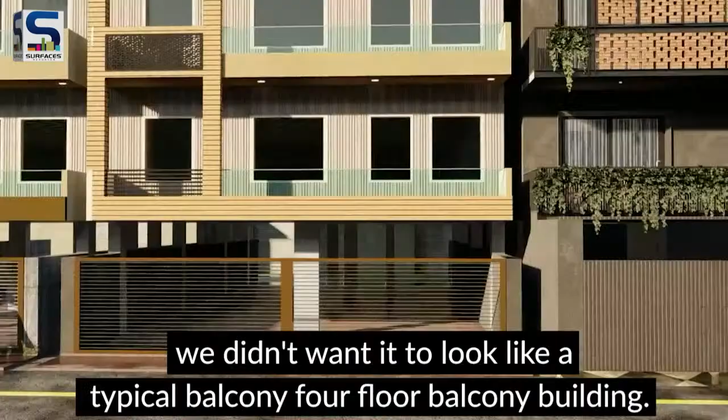My clients were very kind, and they are like friends. They agreed that if we want to explore something, we can go ahead and explore a different kind of material, but it still has to be within the budget. For the facade, we didn't want it to look like a typical balcony, 4-floor balcony building. So we wanted to give it the feel of a house.

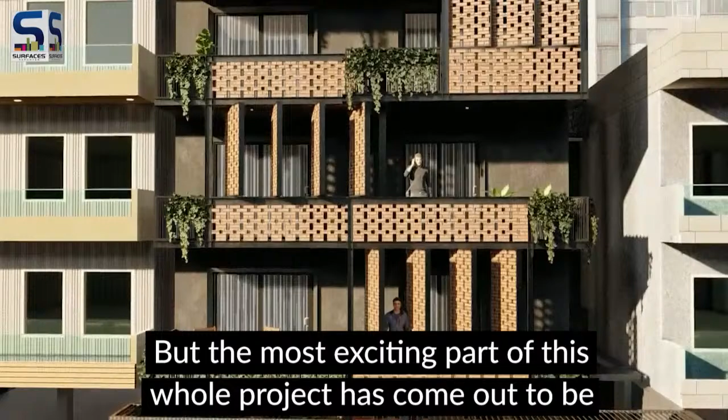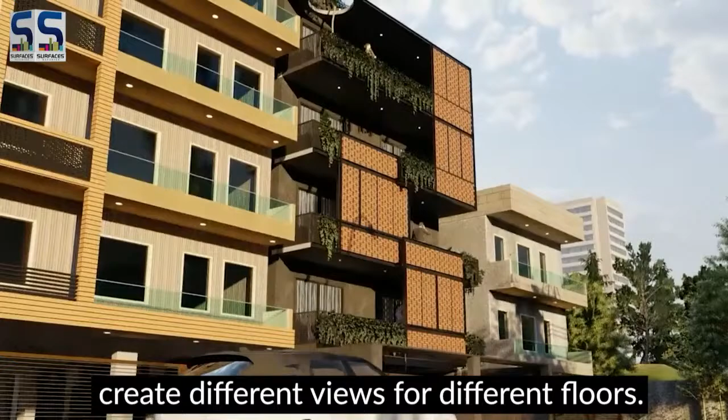But the most exciting part of this whole project has come out to be the kinetic facade that we have created. We created fins which keep on moving at any angle. Every floor has a cluster of fins which are staggered and can move in different directions during the course of the day or even night. So from outside, it creates different angles of fins, creating different views for different floors every single day.

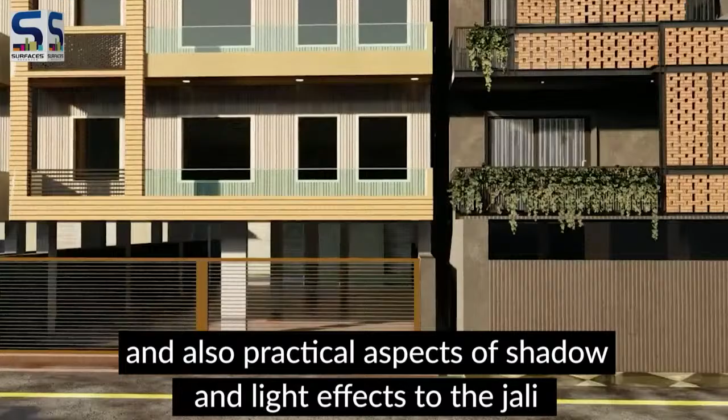You can change it. And from inside, you also get this aesthetic, as well as the practical aspects of shadow and light effect through the jali, through the big brick jali fins. So from inside, you get to see different kinds of shadows and light, and it also protects that side.

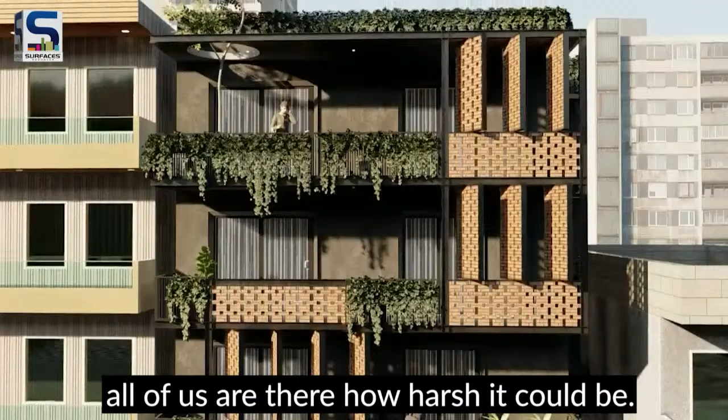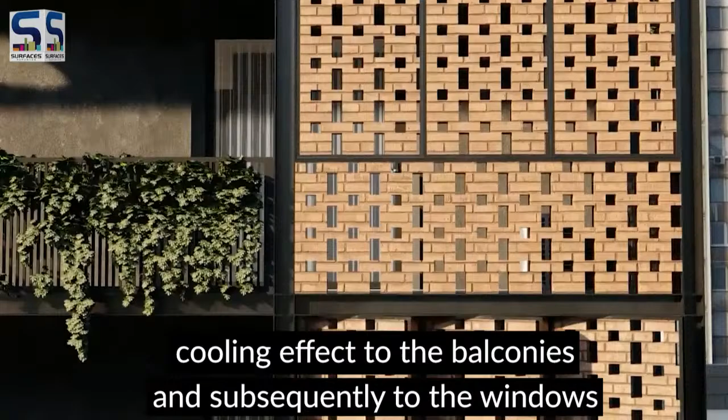The front is southwest facing, which gives very harsh sun during summers, and Gurgaon summers, all of us are aware how harsh it could be. When the sunlight falls and we change the angle of the fins, it also blocks it and creates a very nice screen to give a cooling effect to the balconies and subsequently to the windows of the rooms next to the balcony.

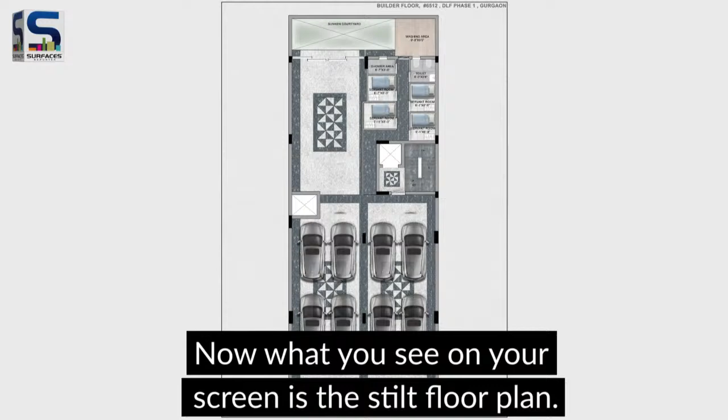Now I'll take you to the stilt plan and the terrace plan quickly. What you see on your screen is the stilt floor plan. We have our car parking systems, and some floor pattern that we had worked out. We have 4 servant rooms also on the stilt floor, which will cater to each and every floor — there are 4 individual floors, so the servant rooms are here. We have a sunken courtyard because we have a basement also, which will be utilized for future purposes. It's just a hall for now, but we wanted to give it natural light.

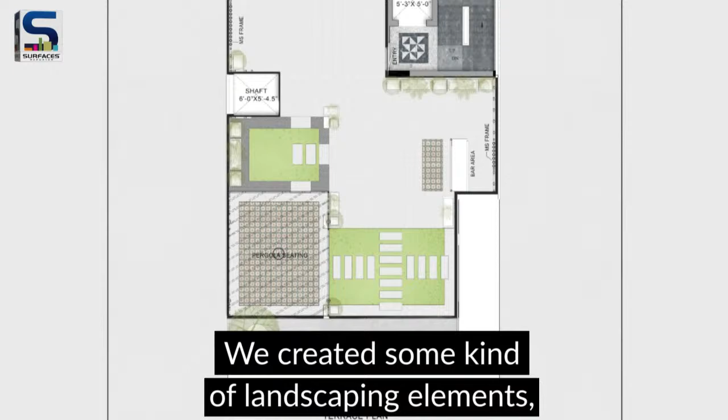Now we'll go to the terrace. We created some landscaping elements, some flooring, some seating, and some pergolas.

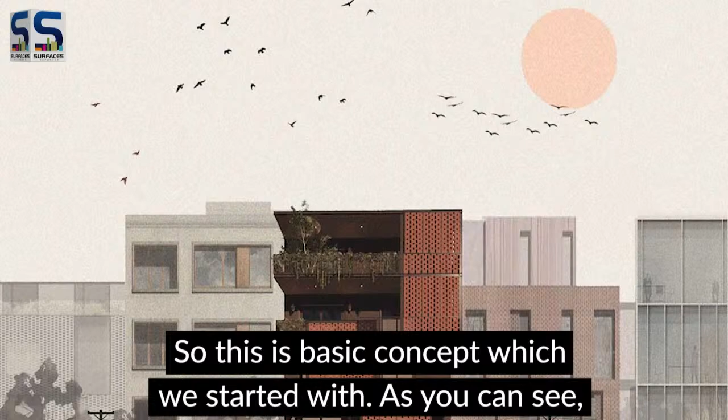Now I'll take you to the elevation, which is the most interesting part of this project. This is the basic concept we started with. As you can see, the lower 2 floors are a staggered screen, and the upper 2 floors are above each other, with a similar kind of screen.

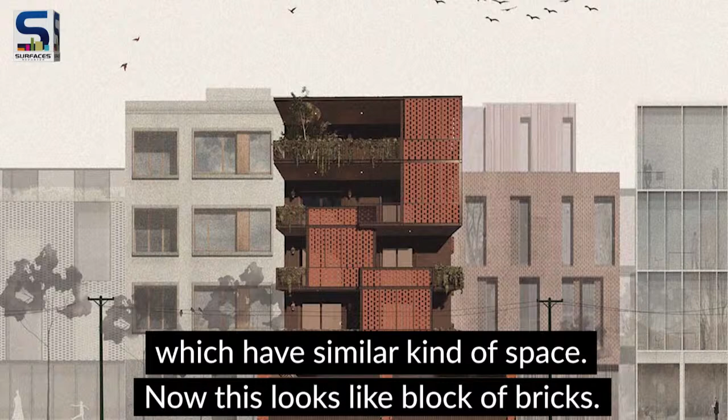Now, this looks like a block of bricks — an interesting elevation, but what is happening, we don't know yet. We went one step ahead and created something like this, which I'm going to share with you on screen.

So these are the openable fins, what you can see. Now, as we can see in this elevation, the fins are opening at around 45 degrees, all in the same direction. But here's an interesting part: it can open at any angle. Every fin can open at a different angle, and it can be rotated very easily, just like a ball bearing.

And you get to see very different kinds of visual interest, both from inside as well as from outside. So if I'm standing on the road and looking at the building, it still looks interesting.

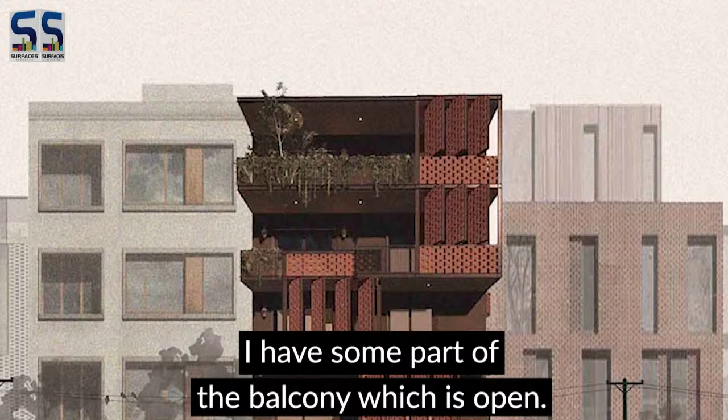When I'm standing inside the balcony and looking outside, I have the option of creating privacy for my balcony, and I can make it a sit-out. I can utilize it for any other purpose, and I still have some part of the balcony which is open. So every floor gets the same thing.

If you see it in a different way, it's just a staggered pattern, and we get the same functionality.

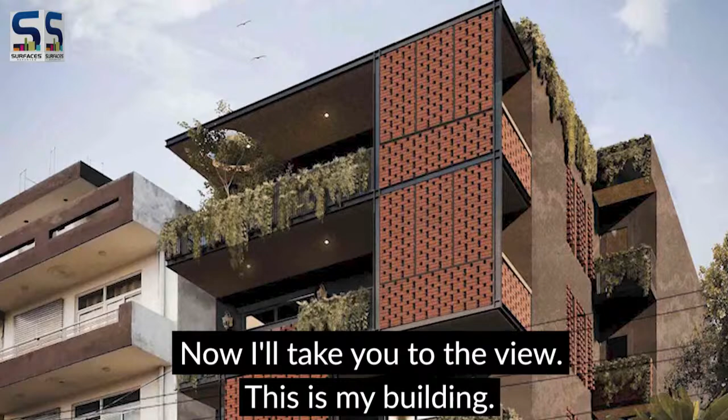Now I'll take you to the views. This is my building. As you can see, these are the closed fins when we are looking at the building from below. Again, the dynamic facade comes into picture in the next slide.

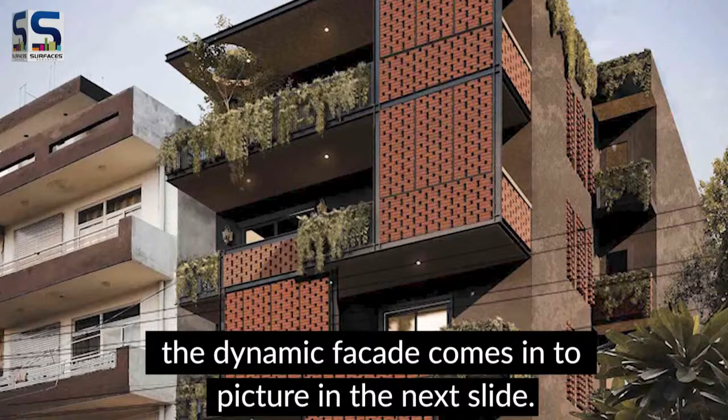So now the fins are opening. And as you can see, the angle of the fins faces the southwest direction, where the sun will be shining mid-afternoon or so, which will create a very nice shadow and light impact.

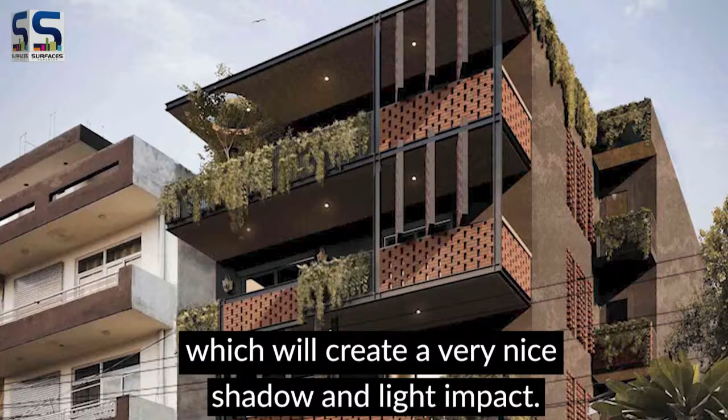The materials are simple, as you can see. There is paint, there is steel, and brick cladding, with some greenery. We tried to make it more of a serene feature rather than just a very harsh, blocky building.

We just wanted to create a little bit of a human touch, so that's why we've added a lot of greens in the balcony.

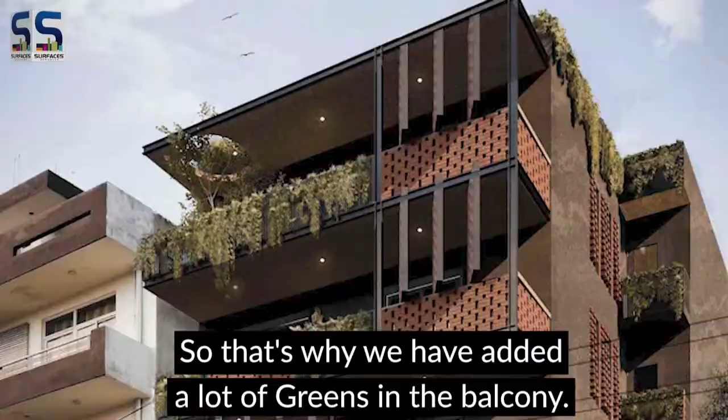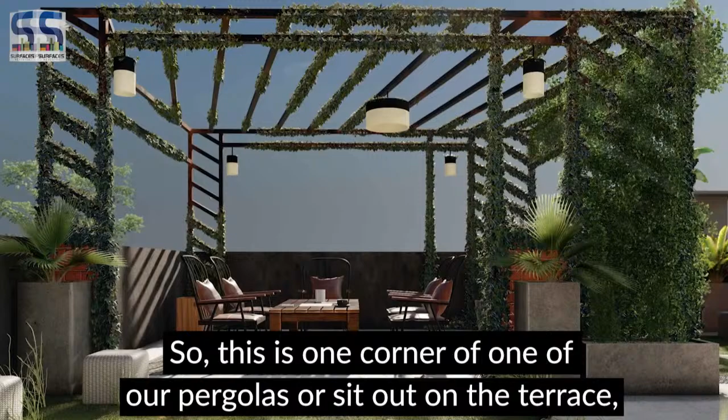Now I'll take you to the terrace. That's also an interesting feature. So this is one corner of one of our pergolas or sit-outs on the terrace, which is made in simple mild steel framing, and then we'll be having creepers which will eventually grow.

With the flooring, we have tried to play around. It's not natural grass; it's like a faux grass, because natural grass will be very difficult to maintain later. So we tried to keep very simple elements so that it's easy to maintain, with no hassles.

So this is the bar on the side. There is also a backing to the bar, which you can see made with bamboo and some mild steel structure, so that it also blocks the view of your neighbor.

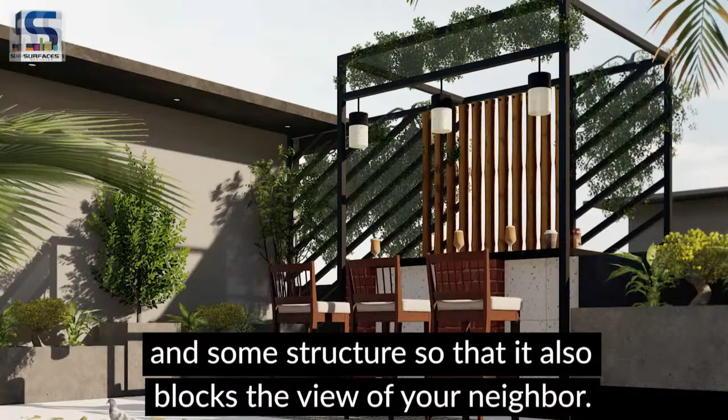The left side is the pergola area, the sit-out. And on the right side, when we come out, we also have a shaft which we had to camouflage, because otherwise you can look straight down.

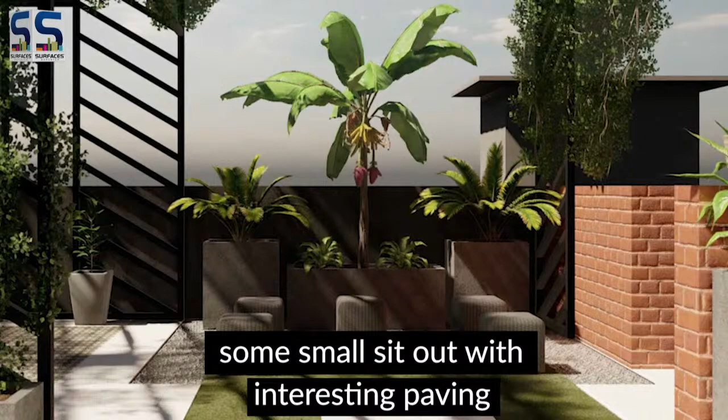So we have created and camouflaged it, and still kept a small sit-out with interesting paving and interesting tiles and grass. We've tried to create a pattern so that when you are up above, you feel away from the concrete of Gurgaon. That was our goal here.